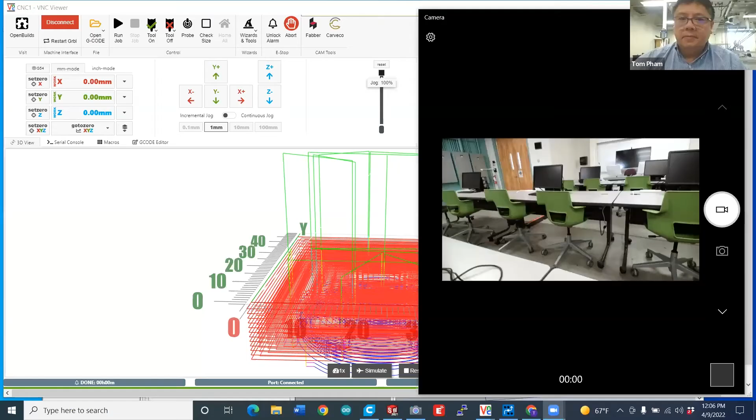Okay, let me share my screen. Okay, there we go. Let me get my camera. Hopefully you can see the lab. I want to move around, but the camera's going to be a little jumpy, I apologize. But there's the lab, there's our lab. We have quite a couple of robots here. This is the Hornet, the one you've seen right here, the Hornet robot.

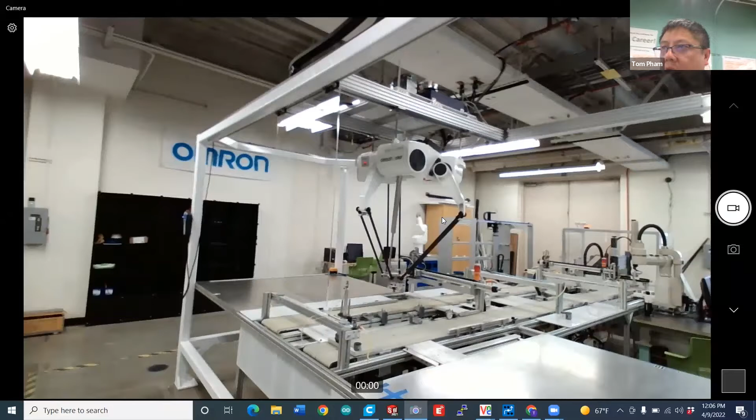We have a SCARA robot, this is a SCARA robot. We have a couple of CNC machines that students usually use to build the parts that's needed for the lab. And then we have an ASRS, a storage robot. And this is the conveyor system. Let me put my camera down. There we go. Oh, I've got the mouse.

And then we have 3D printers. We also have 3D printers. Yep, you can see that, those are the 3D printers. Over there, a group of 3D printers.

So let me go back here and do the conveyor systems. Let me show you, everything is wireless. I'm going to go onto the system. Everything is programmed with drag and drop, making it easier for students to program it. So basically, you get the node, you drag it, you drop it, and that's how you program it. It's very easy. Once you're done with the program, all you have to do is deploy it, commit that change, and it's working.

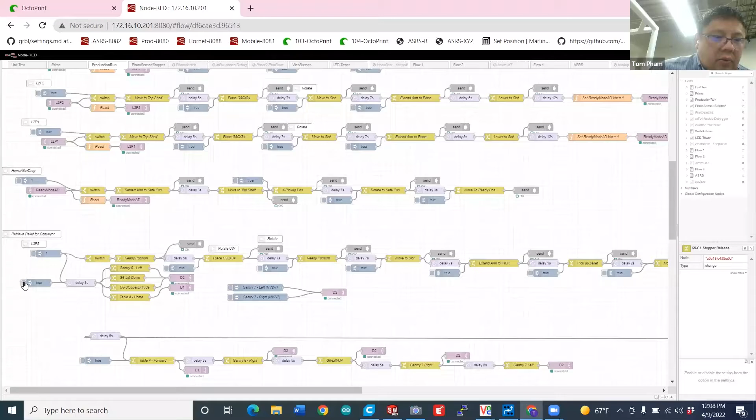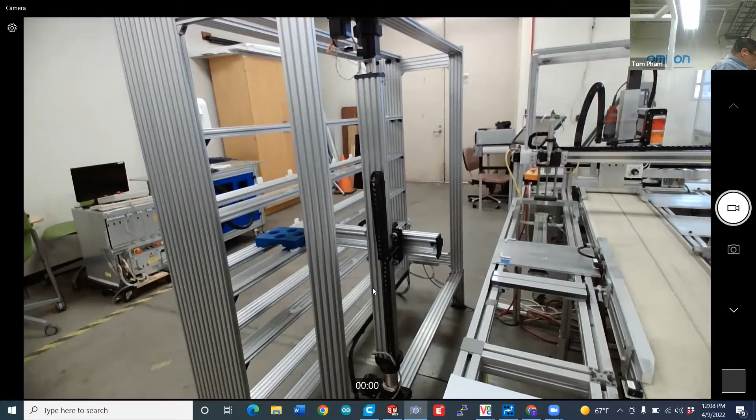So right now, let's say if I want to tell the robot to go ahead, there's no pallet on the conveyor system. I want to initiate that and have it start picking up, building the parts for the system. So I'll initiate it, I'll say okay, run it. Let me go to my camera so you can see it. There we go, so I initiate that, it knows it. I'm going to move the camera back out so you can see a bigger view of it. So now it knows that it needs the parts for the conveyor system. The conveyor system is already getting ready to accept that. So now it's going to retrieve the pallet by the ASRS, automatic retrieval and storage system. So it's going to get that one pallet. There you go.

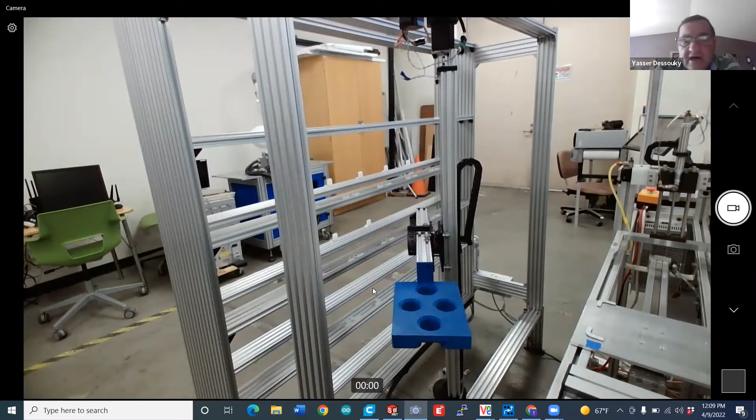To the audience, as you can see, what we're really focusing on is not the design of the robot, but the use of the robot for systems integration and process improvement.

There it goes. Now it knows that it has the pallet, and students usually use Node-RED to program all this. It's very easy and quick because, as you see, it's drag and drop. So a student can program the whole system within the 3 to 4 hour lab period, once they learn all the concepts.

So we integrate that. There we go. So now it sends it off. But when the robot senses that it's coming, it knows that it better start building parts. So the robot will react to that and start building the parts needed for that pallet.

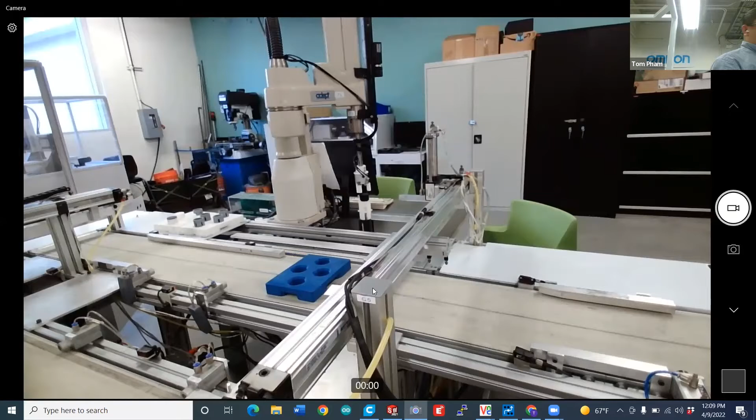I should point out, while you guys are watching this, all these devices are from different vendors. So there's a lot of difficulty in understanding how do you integrate components from different vendors. Sorry, Tom, I just wanted to point that out.

What we're also working on in the lab is a CNC machine. Instead of already having the tops completed offline, what we're going to do is use the CNC machine within the system to cut the part, the top, and then send it to the robot to cap it.

So while this is going, what courses from electrical and computer science are involved in your field? We don't have any electrical engineering courses. We have a programming course, Comp E30, that the students need. The kind of programming for this, you learn in the class because it's machine-based.

So let me move to the other location. You can see the Hornet will start picking the peg and put them in the pallet. Let me just leave my camera over here. Put that down. Okay.

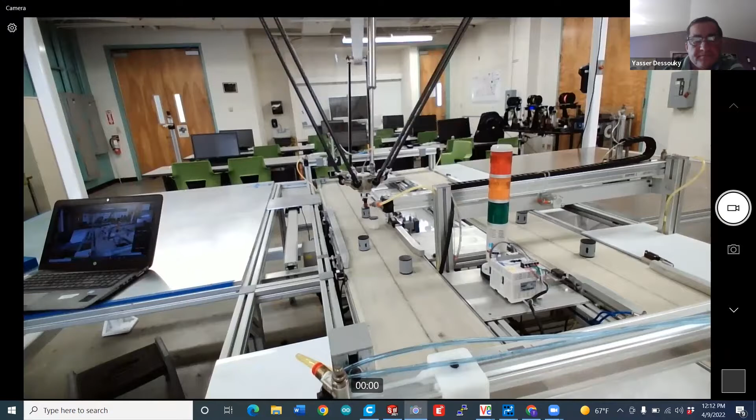Got it. How about you, August? August? And Nathan, I see two more guests. August and Nathan. What are your majors that you've been admitted to?

Go ahead, Tom. Okay, yep, so I'm just letting — I think there's more people who just came, so then you'll see the Hornet's gonna pick up the pegs.

Now, what we have to program, and it's going to happen here pretty shortly, is when they pick it up, they're going to put it in the pallet so it can be stored back in the ASRS system. I'm gonna move to the other side.

What type of math and physics courses would we need, like what level of knowledge would we need for this major? What do you mean, for this major, or for taking this class that uses this lab? Oh, for this major. For this lab, for example, what kind of level do you need? You have to be a senior. So then what type of maths would we need to be taking for this major?

Well, first of all, all engineers have the same math, same physics, and same chemistry requirements basically. So you take that in your first two years. You don't take ISE courses until you're a junior.

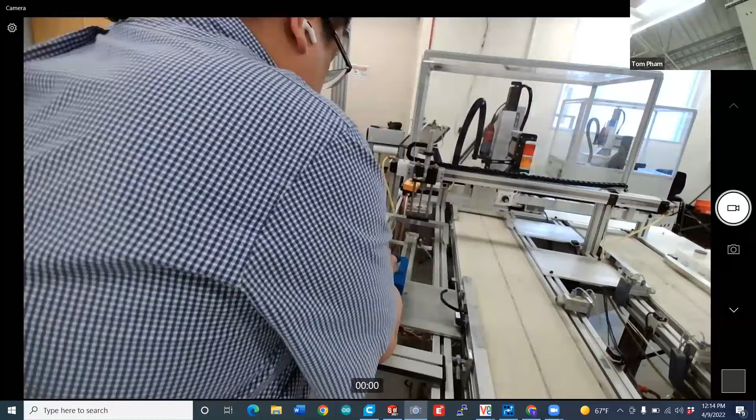There was some delay there. Excuse me? Oh no, I was saying thank you. Did I answer your question, Hassan? Yes, you did.

See, that's what Tom's doing now — after they've completed the processing and manufacturing, you're putting it back and storing it. Okay, let me just show you now the 3D printers and the CNC machines that we also have in the lab that students use.

There we go. What was my mouse? So we have a couple of 3D printers here. You can see we have the 4ANET 3D printer, and we also have the Raise3D printer Pro2 Plus that looks like it just finished printing some stuff, as you can see from there.

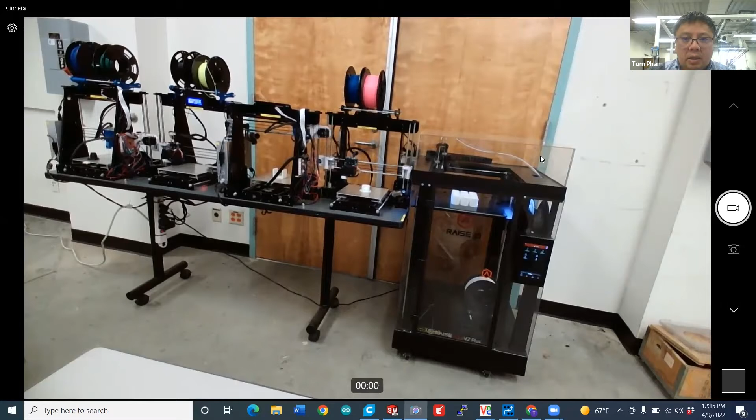But let me show you. So students in the lab are usually equipped with SolidWorks. You use SolidWorks to create the parts. So once you create the parts, let me go back here — so in SolidWorks feature.

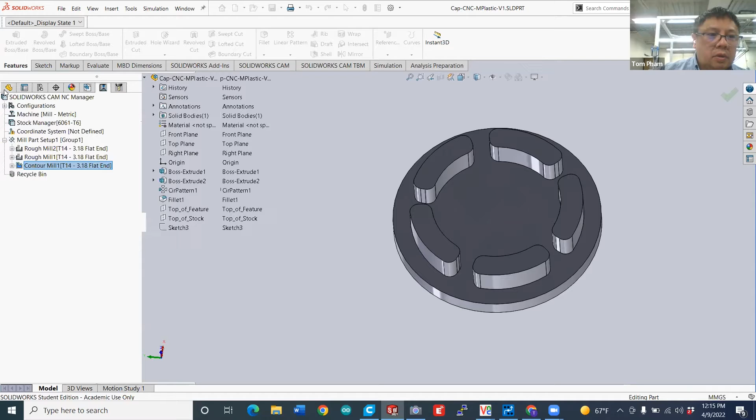Okay, there we go. Back in SolidWorks, usually students use SolidWorks to build the parts. This is the top cap for the parts in the lab.

So students can simply, once they do that, save that part to an STL file and then send it off to a slicer to print it off. So I'll just say send that, I'll override that. So we send it in an STL file.

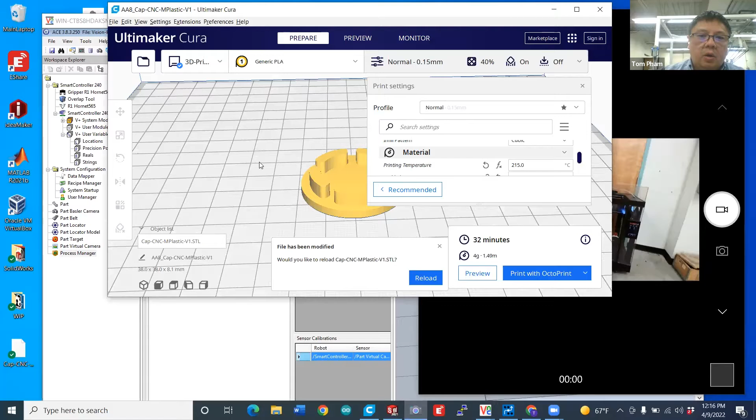Once we have an STL file, we can bring it up to any slicer, drag and drop it in here. For example, I'll delete the one we had, let me minimize the screen. There we go. Then basically you take that STL file we have, drag it, drop it, and there we go — that's the part.

And all you have to do is use the slicer. We use Cura to slice it. Once you slice it, you can send it off to a printer. All of our printers are equipped with a camera, and you can send directly to it—you don't have to get up and send to the camera.

So send that to the camera, send that to the 3D printer, and there you go. The 3D printer will start, and right away from your seat you can see the action of the 3D printer. It's going to auto level, and once it auto levels, it's going to start making the parts. Students love this because they can do everything from their desk in the lab and see it from the camera.

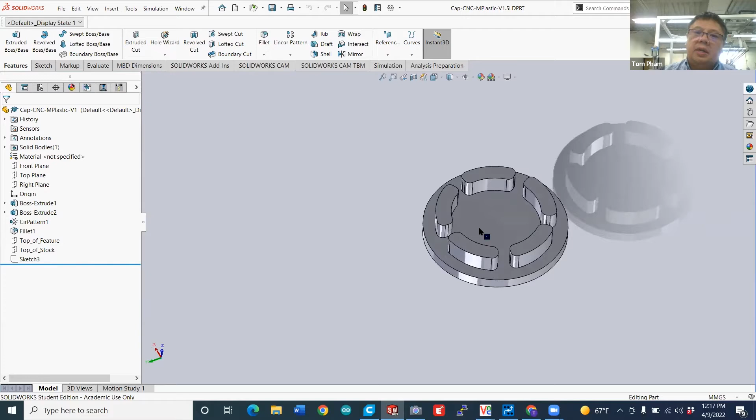Now let me jump to the same thing with SolidWorks. We use SolidWorks in the lab. Many students have SolidWorks experience because many classes require it, so when they come into this lab it's easy since we use SolidWorks here too. So from here I'm just taking it further—we can use this to build the parts.

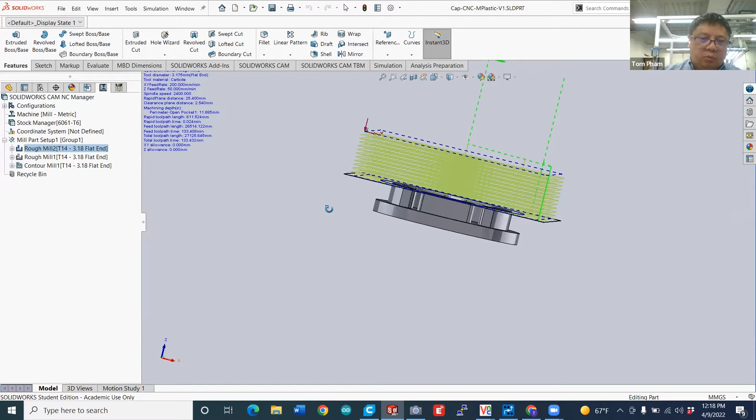For example, we usually get a stock material—this is the stock material to build the part, like aluminum or plastic. Once we have that, since the part is much smaller than the material we purchased, we're going to cut off the top part. Once we cut off the top part, we go in and start cutting the inside of that, and then students do that.

Then we can say, okay, let's go generate code. Students can see the effect of it first before they send it to the machine. So we'll generate the code, the tool path. There we go, we send the tool path.

Once we do that, we go into SolidWorks. There—no, this is hiding it, let me move it out of the way. Okay, SolidWorks has the SolidWorks CAM part. Then we can say let's simulate that, let's make sure it works.

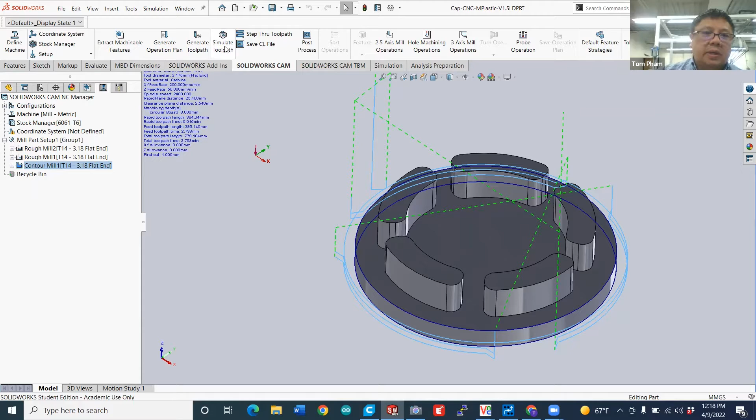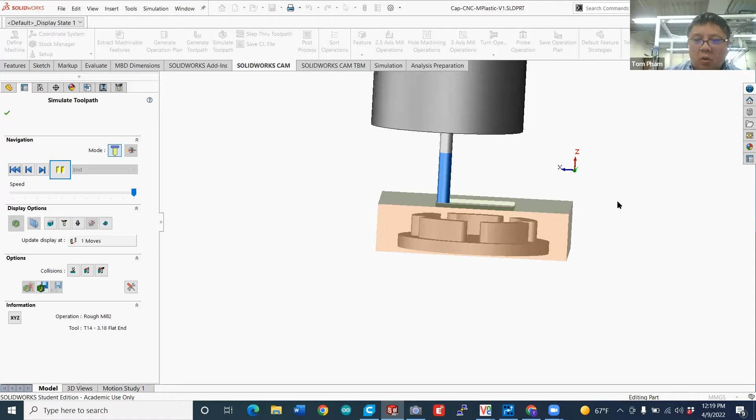Here's our part—the stock material is bigger than the object we're going to build. So all we're going to do is simulate that and see how it cuts through. We can see everything works, looking good—it's cutting through the stock to get to the object we want to build. Once it does that, you can see, there we go, and it's going to cut into it.

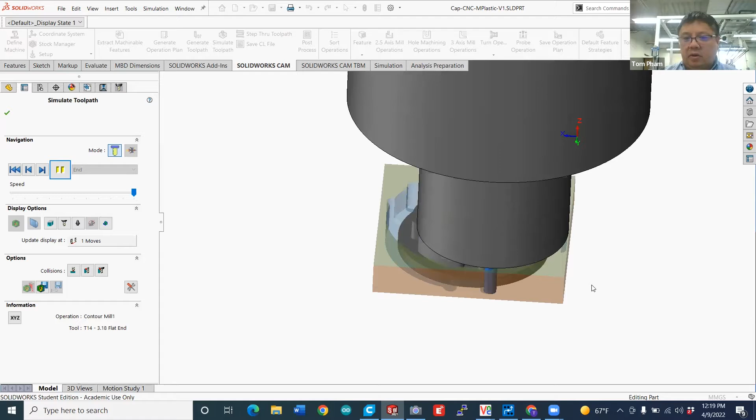And of course, once it cuts into it, it's going to fly off, so students put tabs on it so the object won't fly out of the holder. There you go, there you go—those are the tabs I was talking about, so it won't fly off. Those are the tabs.

So when everything's good with the part, the student will generate the code needed, which is the CNC G-code. They'll say post-process, send that, build that G-code. I'll say build the G-code, numerical control, we'll save that, replace the old one, then generate that code.

That part takes about 3,000 lines of code. So SolidWorks will produce the required code for us. Once we have the code, we can send it to the CNC machine—let that process, it's about 3,000 lines of G-code.

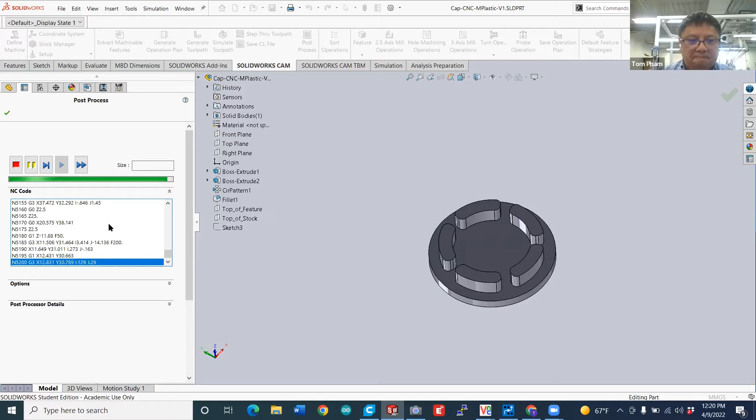Any questions while this is generating the G-code? Okay, once it's done, I'm just going to close it.

Then we can send it to the CNC. I'm going to save it to the CNC machine—172.16.10.215—and then share the folder.

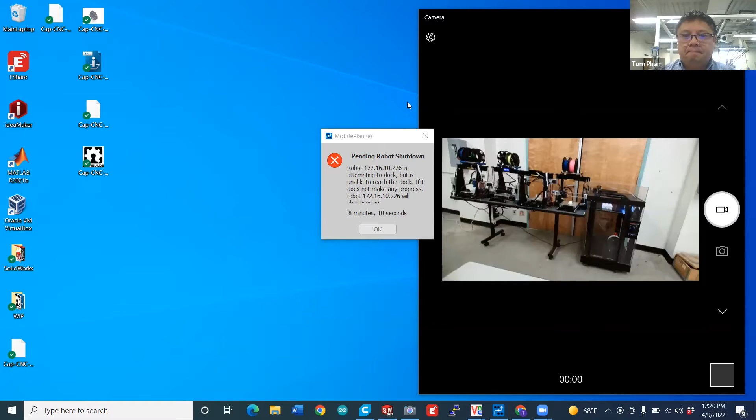So what exactly is G-code again? G-code is the machine language that the CNC uses to make the routes. That's what G-code is.

Same thing as the 3D printer—remember that 3D printer we used here, it produces the same thing as G-code. Let me just show you. Good question, good question. So here is the numerical control that is sent to the CNC machine—that is the G-code.

So that's perfect for our lab. We'll just save it and send it off.

In the case of the 3D printer, let me go back into that. A while ago when we slice it, that's what it does - it basically cuts it down to layers. So maybe this will help you understand it.

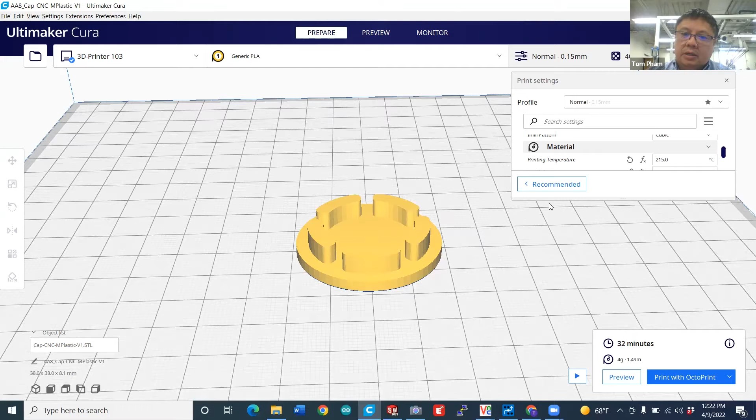So here is the cap again. If I go into here, maybe you can see this better. So I can break it down to layer - that's what it does.

So this is the first layer. It's going to deposit that. Let me go all the way down. There we go. And then I'm going to go up a layer, and it's going to deposit each layer and each layer.

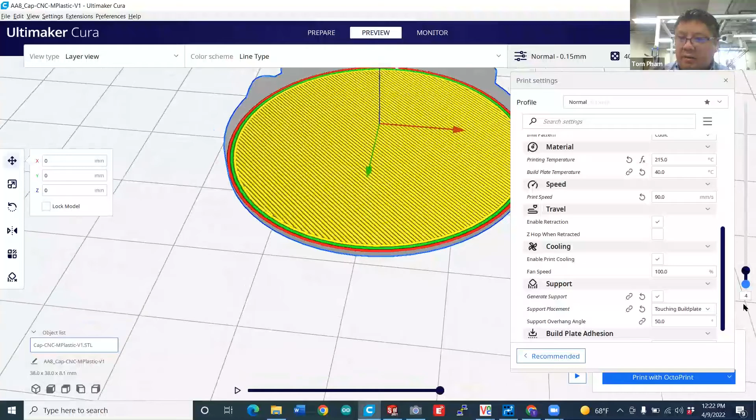And that is the G code. So if we run it, you'll have a better sense of it. Let me take it all the way down again. There we go, and I'll run it. So that's good.

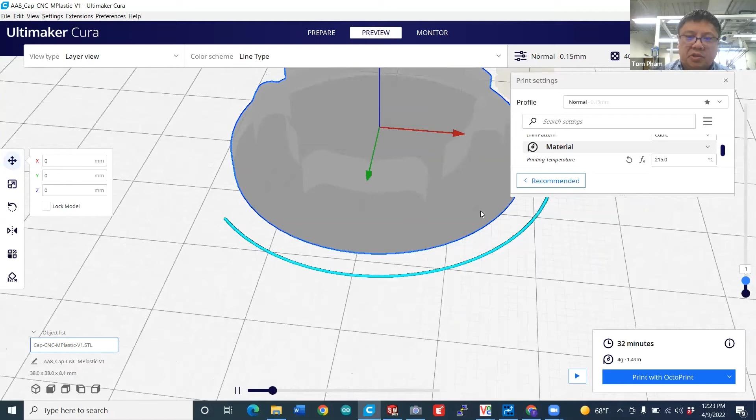See, that's the first layer. That is the G code saying, okay, produce that circle. And that's the G code to do that. Let me zoom out, and there we go - it'll go through all the steps.

I'm going to push it faster. There we go, that's the G code - it goes to produce that.

So instead of sending it directly to a printer, in the case of the 3D printer, I can save to disk, for example, save to my disk so you can see the G code produced. It's going to say G code, onto my desktop. So I'll save it on my desktop and go to my desktop so you can see that G code.

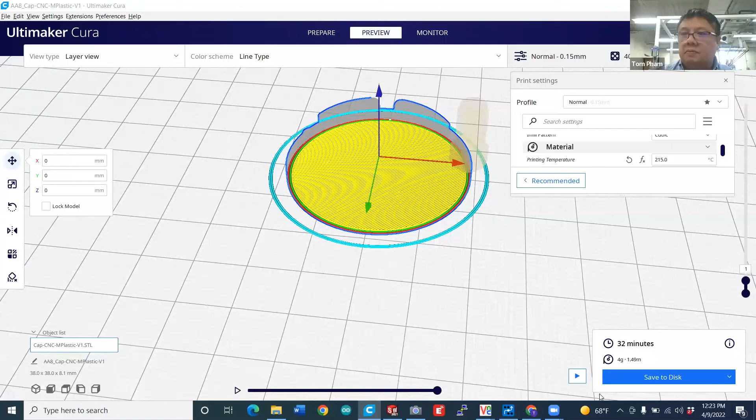Okay, there we go. I want to look for my G code. Nope, that's not it. Where's my G code? That's my numeric control, and there we go - that's my G code right there.

So that's the G code that we produced. We'll open it up, and that is the same thing. It's just saying go to the X axis, go to the Y axis, and extrude this much of, for example, PLA, which is the material we use here - deposit that much plastic, extrude 224. Okay, so there we go.

And talking about the CNC machine - so we send that out to the CNC machine. Let me show you.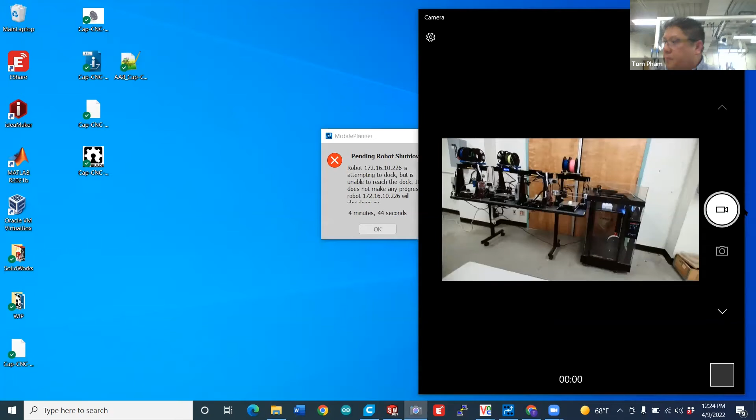Let me just bring the mouse with me, sorry about the camera movement. We do have the CNC machine - just as an example, the 3D printer deposits material, while here we're just removing material. So this is our CNC machine.

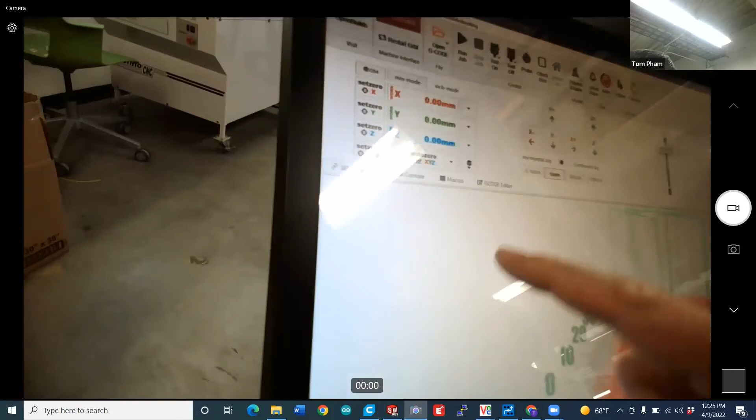So I am going to start the machine up, and I'll show you the camera also. Let me show you - I will start it. Okay, start, turn on the router. You probably can hear the machine running.

And that is the cap that we built a while ago. If I can move it around, you can see the cap in there. So that's what you go to - basically telling it to go each layer and cut the material. I am going to say go ahead and run that job. Let me put the camera in there so you can see it.

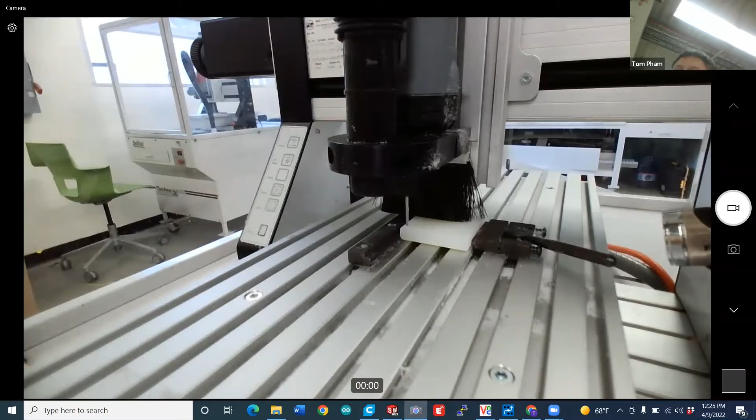There we go, and I'll just say start the job, run the job. There we go - the CNC machine will go in and cut the material needed.

There we go, it's time to cut. We can do plastic, aluminum, wood, anything. Just some of the aluminum that we've cut into, but there's some plastic we're coming to now.

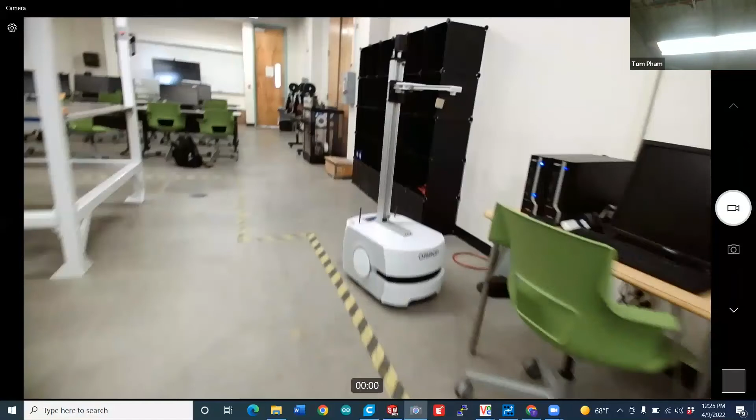Oh, Hassan, are you still there? Yeah, I'm still here.

So I don't want you to think that this is only what industrial engineering does. We're systems people - our students are found in all industries.

You've been to Disneyland? Yeah. You know the Fast Pass? Yes. We do - IE's designed that.

So we are process people. If you're interested in process design, then that's us. If you're interested in product design, that's mechanical engineering.

So if I want to do a minor in industrial engineering, am I able to do that? Yeah, but the minor doesn't have this course. It's more on engineering management and quality - our minors, but not with manufacturing, not with systems manufacturing.

So what would I learn in engineering management? Like, what would the courses be teaching me? Engineering management is exactly like the name specifies - how do you make the projects, make sure that they're costed right, how do you lead a team?

How do you manage a project to make sure all the tasks, times, resources, and people are available for the various tasks you need to work on to complete it successfully? How do you teach ethics?